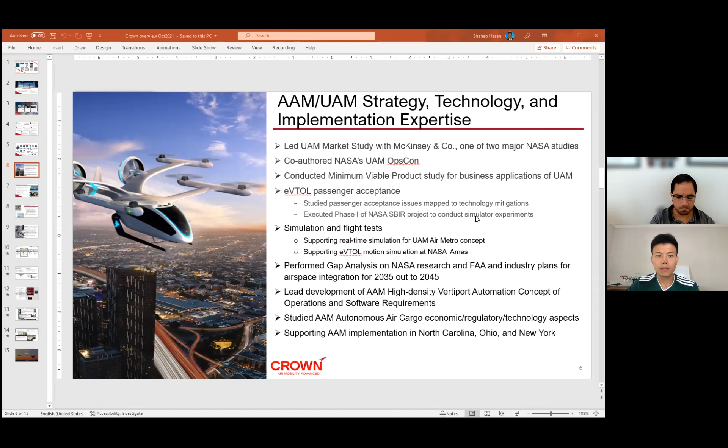Okay, hearing none. So I mentioned North Carolina. We were part of their team for the FAA's Integrated Pilot Program, IPP, which is now completed. We are supporting them on the follow-up program, called Beyond, as well. That's not on the slide, but we're active with it. And I mentioned some of the things we've been doing.

Some of it is helping other companies like UPS support operations within North Carolina. We've helped them interface with the FAA, and we've kind of been the coordinating partner between other participants, listed there. North Carolina is very interested in NASA's UTM concept for small drones, and what they've been trying to do is put into place a statewide UTM operation, specifically for emergency service response, so they're not necessarily beholden to a commercial provider and instead have it operated on their behalf just for those kinds of operations.

That is not in place yet, but it's in discussion with the FAA, and we're helping facilitate that as well. I mentioned some of the operations happening in North Carolina—we've been active in that. We've done some of the safety case analysis and helped get the necessary waivers for those operations, which is on the leading edge of these kinds of operations.

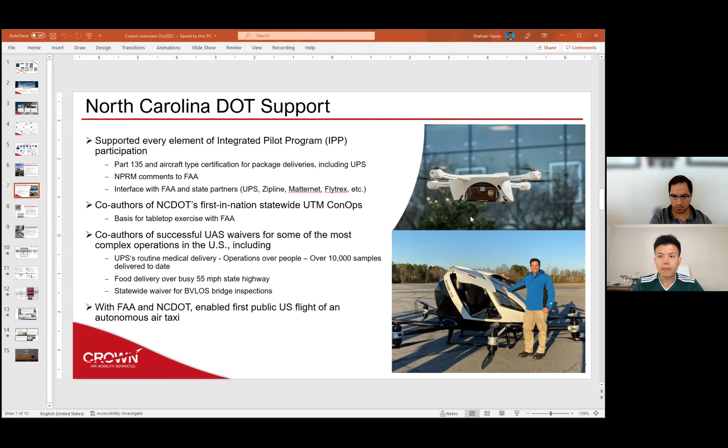There was also a lot of surveys involved with that, because there's a lot of different industry and participants that would have to be involved in making AAM a reality. So we got input from all of them as well.

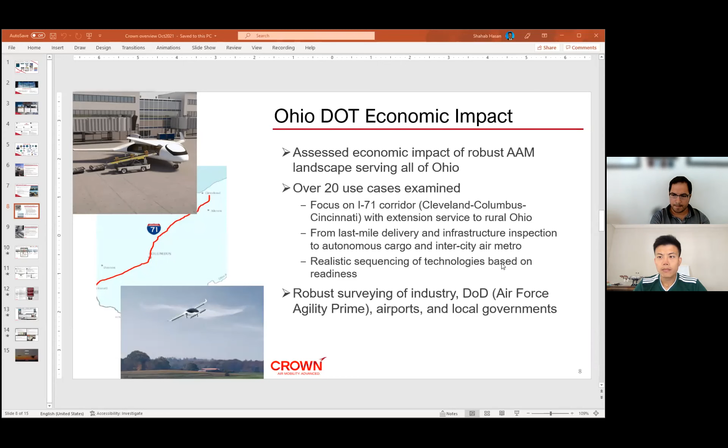Another place that we support is up in New York. There's an organization up there that runs things called NUAIR—I don't think I've got it spelled out here—that is Northeast UAS Airspace Integration Research. They operate that FAA UAS test site up there in New York.

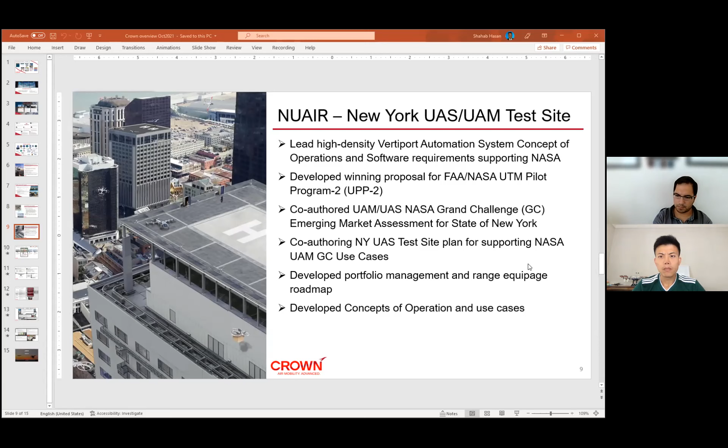Okay, so I promised I would go into a little bit more depth on this project to develop an AAM high density vertiport concept of operations.

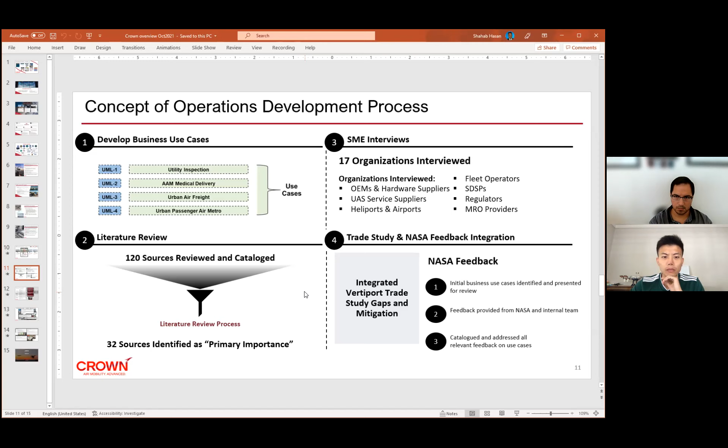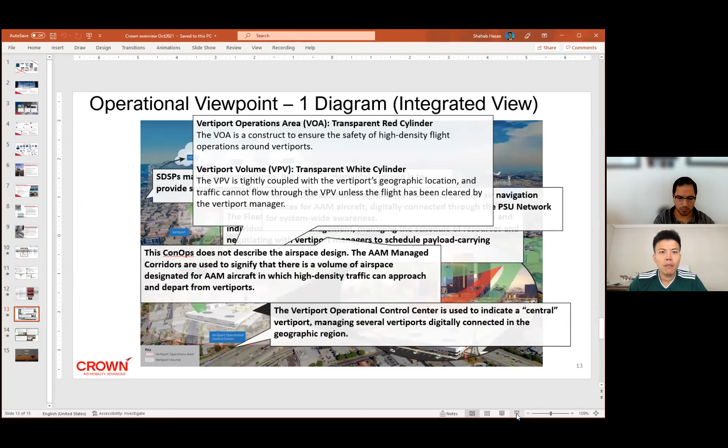So one of the things, let me put this in slideshow mode here because this slide builds. Everyone's still seeing the slides okay, right? Yes. Okay, so let me click through here.

So you see this nice pretty picture. This was one of the products that we developed. This is a so-called OV1, operational viewpoint diagram. This is adapted from enterprise architecture principles. And you see a lot of different elements on here, and I'm going to try to walk you through these fairly quickly.

So first of all, in the lower left-hand side of the graphic, you see a couple of cylinders. The outer cylinder, the transparent red one, is what we call the vertiport operations area, and then the inner one is the vertiport volume. So that space around this kind of facility, the vertiport, is where you start to have operations coming in and out. The outer cylinder is kind of the outer boundary, as you would expect, and then the inner one is sort of protected airspace, where no one should be except the vehicles that are actually taking off or landing from this particular vertiport.

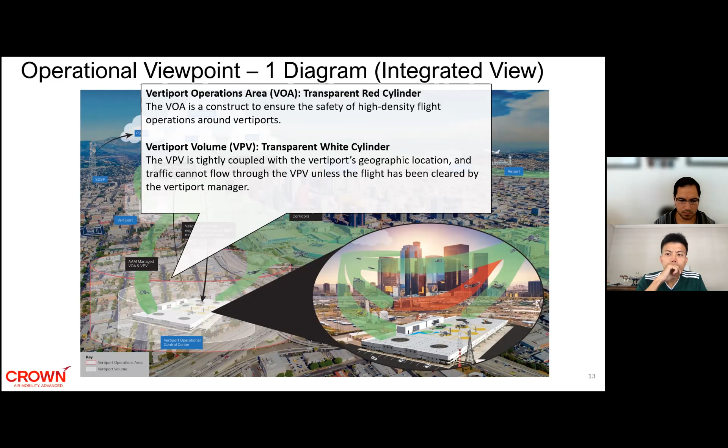Backing up to the big picture, you see the cloud icons in the upper left, and those represent different providers of service for UAM, PSUs. That terminology comes from the NASA and FAA concept of operations for UAM. Those are entities, PSUs, that, as their name implies, provide air traffic services rather than the FAA providing them directly. The PSUs provide those to the different operators and vehicles serving AAM missions.

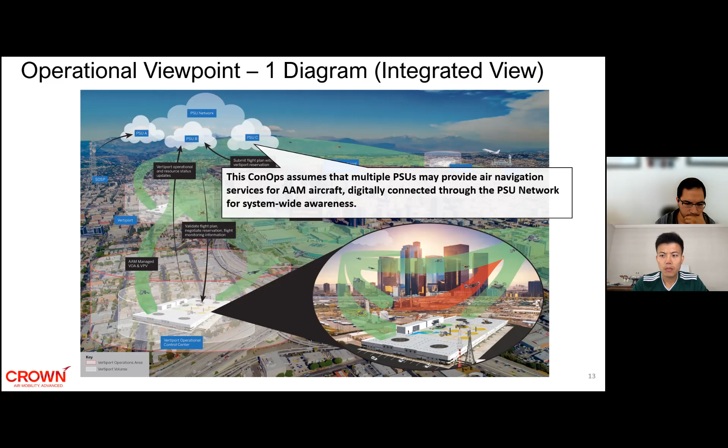The Vertiport Operational Control Center is kind of the hub, the brains of what's going on within the facility, looking at graphics, big screens of the incoming and outgoing traffic, what's going on the surface, and what's happening within the region of the vertiport, potentially including other vertiports if they're in relatively close proximity.

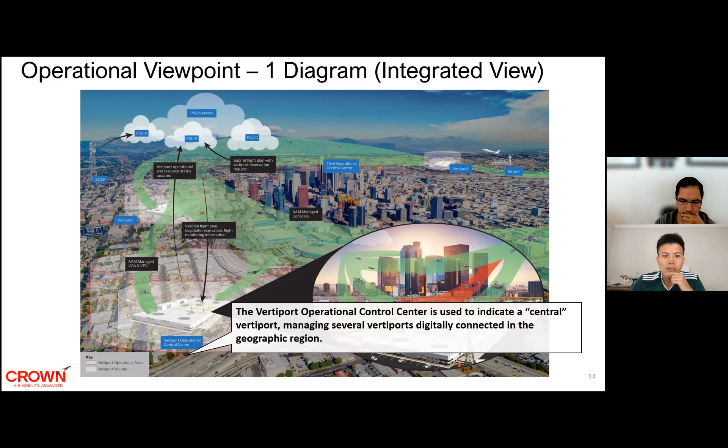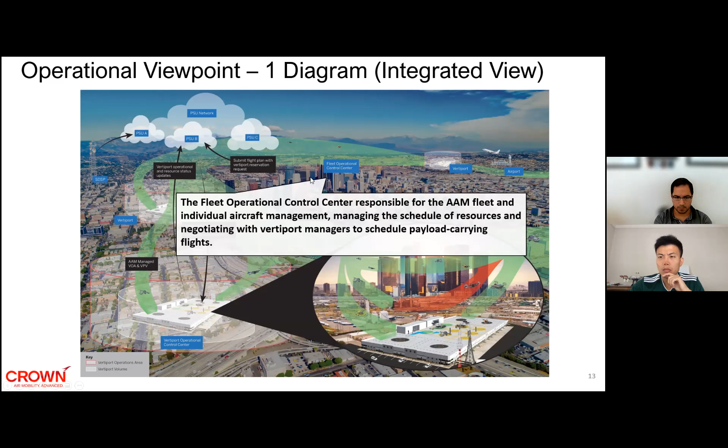The vehicles themselves would be communicated with and in some sense controlled by a fleet operational control center. So the vertiport isn't actively managing those vehicles, especially not on their way to and from the vertiport. That would be done by the operators themselves through these fleet operational control centers.

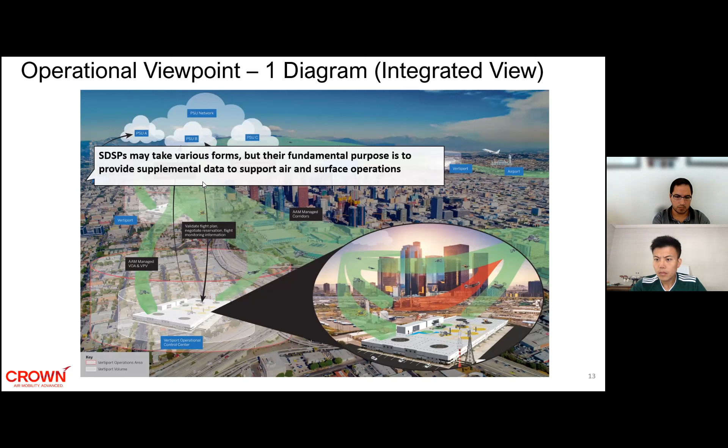So I mentioned PSUs before. There are also other providers or stakeholders or commercial entities involved. One of those are SDSPs, Supplemental Data Service Providers. A commonly cited example is a weather provider. Especially for AAM where local micro weather is very important, that would be a service provided by a third party to PSUs or directly to vehicle operators.

All right, let me move on. So next we have a second OV1, and this one focuses more on the vertiport itself. The other one was kind of a big picture of the system that's operating, and this one is more close to the vertiport itself.

You see the green and red swooshy paths. The green ones are the nominal flight paths of the aircraft trajectory. What we're depicting here is consistent with the FAA and NASA concepts of operations. Think of these as the flight corridors or tubes that the AAM aircraft would be operating within.

Oh, and by the way, the red ones are where flights have been rerouted. For example, if there was a conflict or an anticipated conflict and an aircraft had to deviate, that's what the red is depicting.

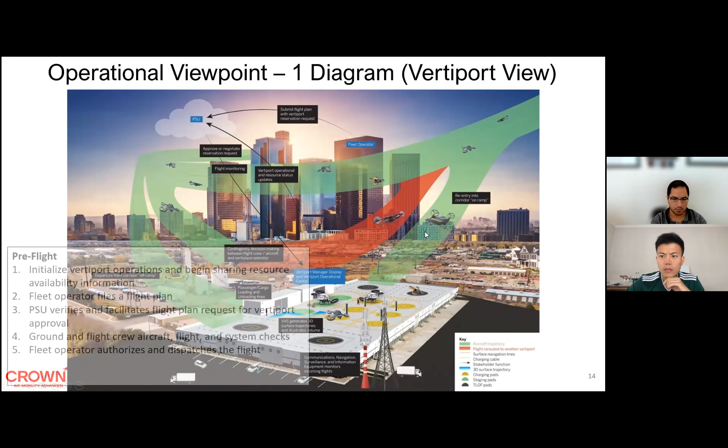So what the slide builds through is the activities that would happen as operations proceed. First, you would have pre-flight activities before anything happens in terms of flights taking off or landing. You see the various kinds of activities, including filings of flight plans, the coordination between the ground and these PSUs, and that culminates with the fleet operator saying, okay, you're good to go, you're authorized, and the flight is dispatched.

That then takes you to taxi and takeoff, which again involves coordination between the PSU and the vertiport, and both of them coordinating with the flight crew and the aircraft itself.

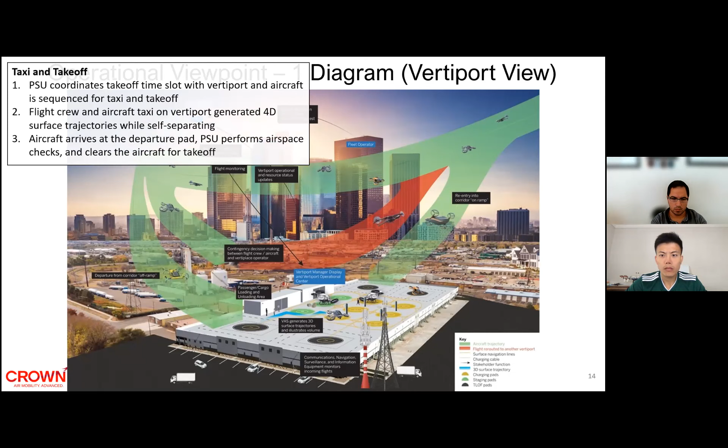Then you transition to climbing out and cruising. That part of the operation is fairly similar to traditional operations, except that you're coordinating with the PSU more than with traditional air traffic control or air traffic management.

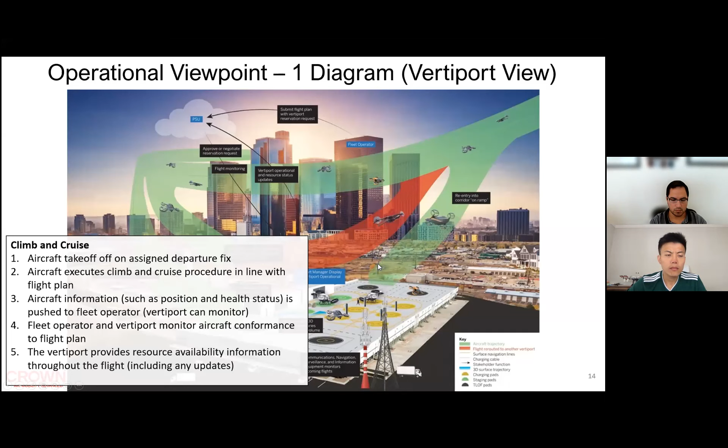Then finally, on the other end of your trajectory, you do the same kind of things in reverse for your approach, where now you've entered those two cylinders I talked about, the VOA first and then the VPV. As you enter those volumes of airspace, different actors do different things, and that's what we're talking about with the approach steps.

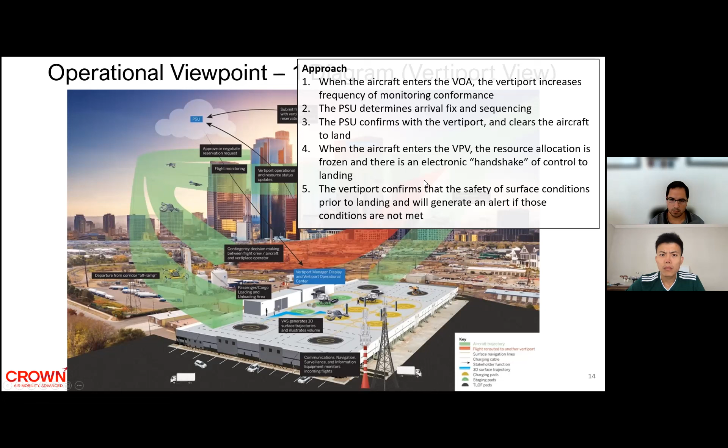Then finally, you go ahead and land, taxi, and deplane, and that's where the action's happening on the vertiport surface.

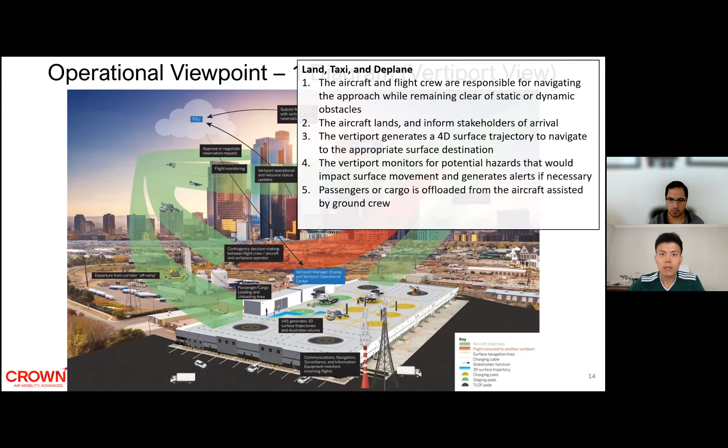That's a very fast walkthrough, but I wanted to keep it fairly brief so there was plenty of time for questions. I can answer questions about Crown, about the vertiport project, or about our other projects.

As I offered to Peng when we talked about this, I happen to have experience in a few different varieties of the aerospace profession. I've worked as a civil servant at NASA, for a not-for-profit company, and for a small for-profit company. I'd be happy to talk about that or any other career-related aspects.